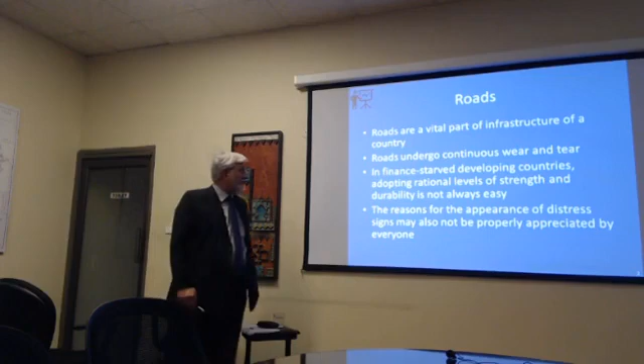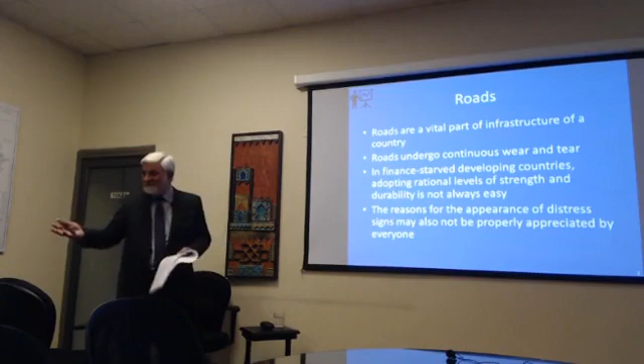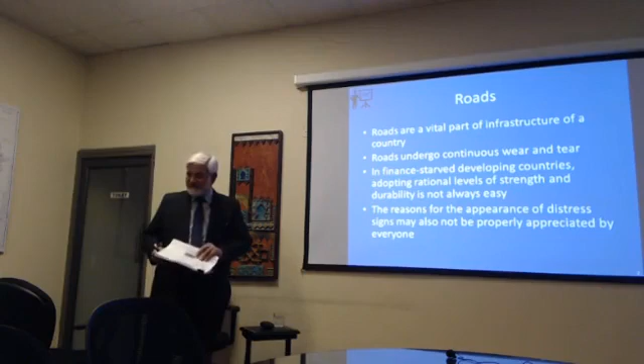Roads, as you know, are a vital part of the infrastructure of a country. I don't know the diversity of the audience, so I have some very basic things - senior people like you might find it too basic, but I have to include it. You must understand that roads, however well built, undergo continuous wear and tear. In a country like Pakistan, which is already finance starved, adopting rational levels of strength and durability is not always possible and easy. The reasons for appearance of distress signs may also not be appreciated by people, and commonly they'll attribute it to the bad practices of engineers and to the bad use of materials, but it is not always so, as I will tell you in the coming slides.

J.L. McAdam was born in 1756, a Scottish engineer who later moved to the USA. He modernized road building by raising embankments so that adequate drainage could take place. Before that, roads were built on the surface and were in a flooded state all the time.

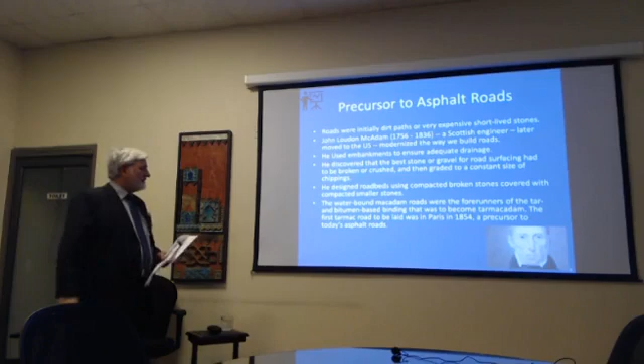He discovered that the best stone or gravel for road surfacing had to be broken down. Today we still use angular crushed stone rather than river-rolled aggregate, and he was the person who really invented this. After him, we have the term water-bound macadam, still used to this day, where road beds use compacted broken and smaller stones, the same methodology used in WBM today.

Asphalt dates back to 1824, when asphalt blocks were first placed on the Champs-Elysees, the well-known commercial street of Paris. The asphalt as we see it today was the work of a Belgian immigrant, Edmund J. DeSmedt, at Columbia University in New York, USA. The first use of asphalt was in New York City in 1877.

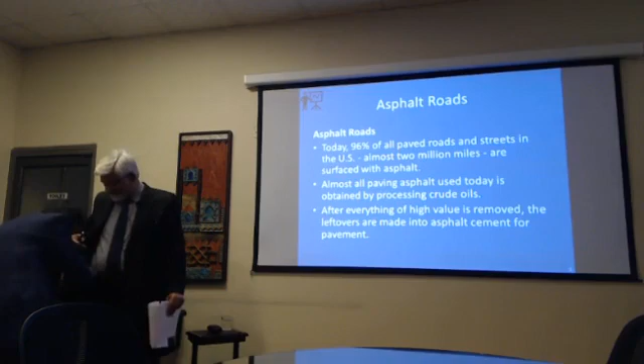Let me clarify at this stage: asphalt is the term used both for bitumen as well as asphaltic concrete. For today's lecture, when I say asphalt, that means hot mix asphalt concrete, not bitumen.

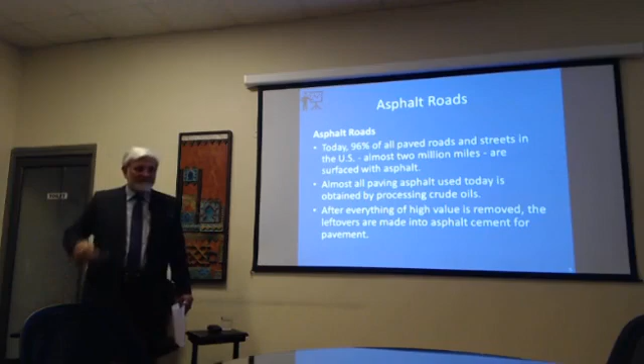96% of the roads in the USA are asphaltic. Pakistan has a history of PSP roads, but we are switching to asphaltic roads, alhamdulillah. And C&W now has almost 60 to 70% of major roads which are asphaltic. Asphalt is obtained from the process of refining crude oil; after obtaining all the useful material, whatever is left is made into asphalt cement for the pavement.

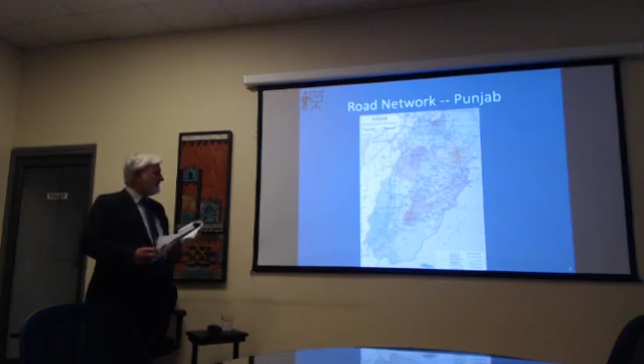The road network of Pakistan includes motorways, national highways, strategic roads, and arterial roads. In the provinces, we have portions of the motorways, the intercity or provincial roads, then district roads which are now merged into provincial roads, and farm to market roads, sugar cess roads, and so on.

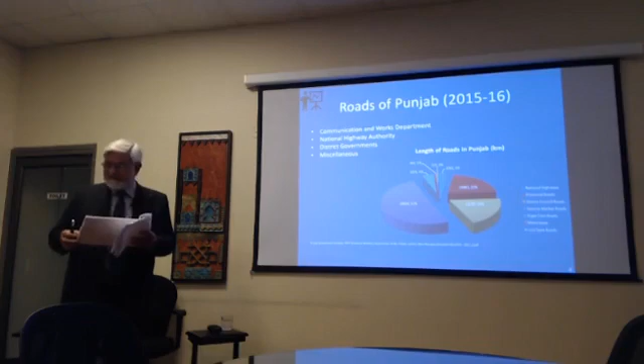This chart shows the percentage or lengths of various categories of roads in Punjab only, based on 2015-16 data from the Punjab Development Statistics, Bureau of Statistics, Government of Punjab, printed in 2017. You can see about 51%, or 39,000 kilometers, is the biggest percentage for farm to market roads, and provincial roads are 16,000 kilometers or 22%.

Then we have a portion of M2 and M3, as you know, in Punjab.

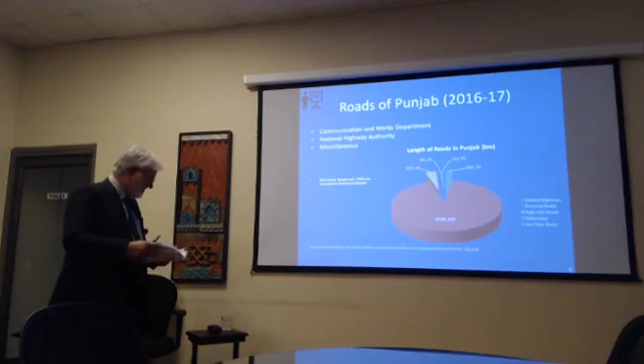This is the next year's data from the latest printed Bureau of Statistics figures. All the district roads and farm to market roads are now merged into provincial roads, so you see 93% of them are now called provincial roads, and the rest are the same as the previous year's data.

As a user, even if not as an engineer in the highway field, you must have seen that rutting, from less to major severity, is present in many roads in Punjab, especially the farm to market roads and district roads which were previously dealt with by district governments. They are more prone to rutting.

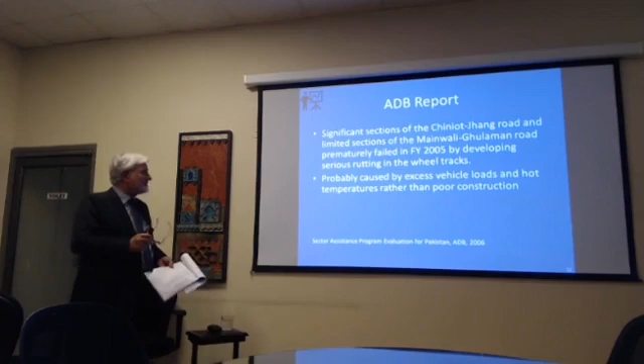This is an ADB report from 2006 by the Asian Development Bank. They reported that significant sections of Chiniot-Jhang Road and limited sections of Mainwali-Ghulaman Road prematurely failed in 2005 by developing serious rutting in the wheel tracks. But they are confident this was caused probably by excess vehicle load, not by bad materials or poor construction.

We have two types of pavement commonly used: flexible and rigid. Flexible is subdivided into TST roads and asphaltic concrete roads. Rigid may be with reinforcement or without reinforcement, the first being jointed plain concrete pavements and the other continuously reinforced concrete. I think we can skip this, everyone knows it.

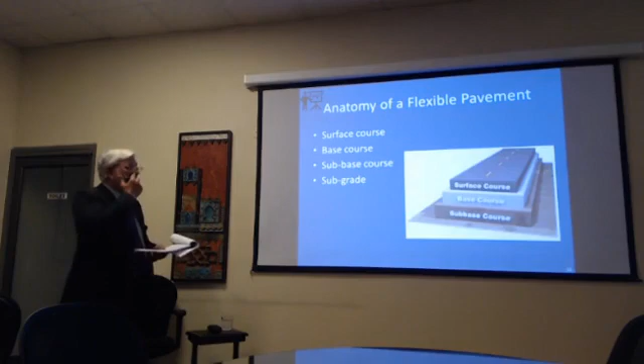This is the anatomy of a flexible pavement. We have a compacted subgrade of soil, a subbase resting upon it, a base course which is a superior material than subbase, and that is overlaid by a surface course which can be TST, or in our case asphaltic concrete, hot mix asphaltic concrete.

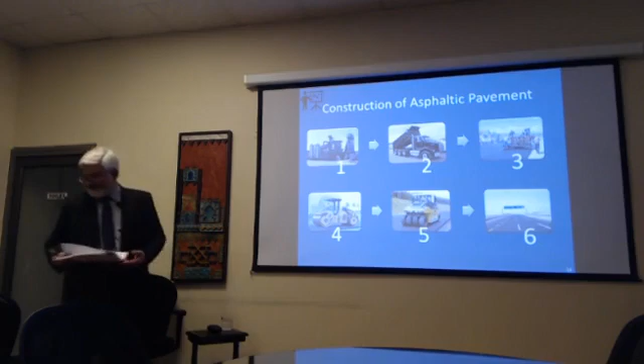Here I am showing you a brief cycle of how an asphaltic road is constructed. It starts with making asphalt in the asphalt plant, transported through trucks to the site and laid through asphaltic concrete pavers. Then it is rolled by steel rollers and pneumatic tired rollers, and you get this final shape that you comfortably travel on.

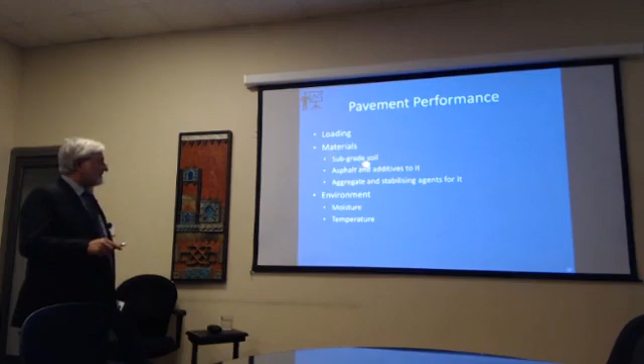Well, the performance of the pavement, largely we can categorize into these subheads: how the loading upon it is acting, is affecting it, how the materials used are affecting it, which are subdivided into the soil, as I already told you, the asphalt and additives to it.

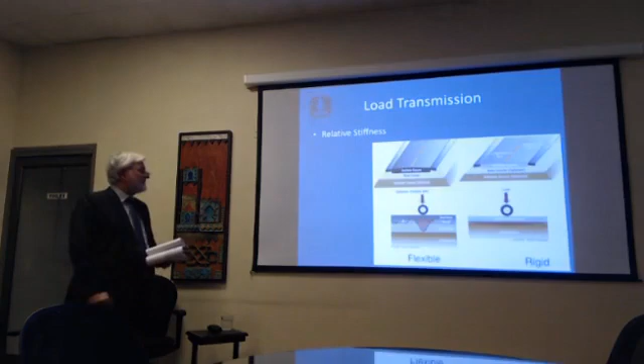Then aggregate and stabilizing agents for the aggregates. Environmental factors include moisture and temperature, of course, temperature being the most cruel factor for the asphaltic concrete. Load also, excessive load, is also a very cruel enemy of the asphaltic surfaces.

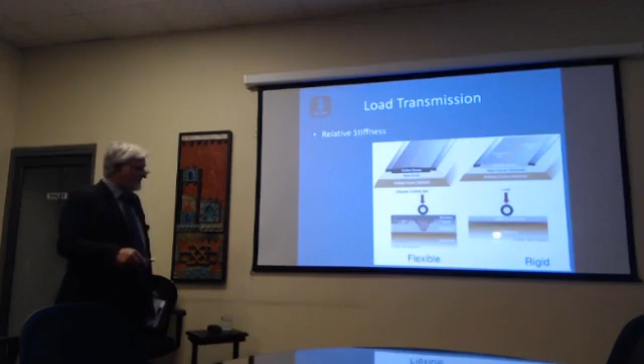The load transmission in case of rigid and flexible pavements - the pressure bulb, as you know, in flexible pavement, the relative stiffness of the top surface is lesser than the stiffness of the underlying layer. Whereas in rigid pavements, the stiffness of the top surface is comparatively higher than the subbase and base material. The Americans call everything below the surface as subgrade.

So we have a stiff material resting on a lesser stiff material in rigid pavement. So the distribution of load in rigid pavements is better, and in asphaltic or flexible pavements, it is confined to a smaller area. That is why they are more prone to damage or deterioration.

Other than rutting also, you know, there are so many other distresses which can affect the pavements - cracking, deformation, deterioration, material problems, and problems associated with the seal coat.

This itself is a very lengthy lecture if I come to other factors. So I've just enumerated what cracking could be - of the type longitudinal, fatigue, or transverse, or it can be reflective cracking if the asphalt is laid on a rigid pavement or concrete underlay.

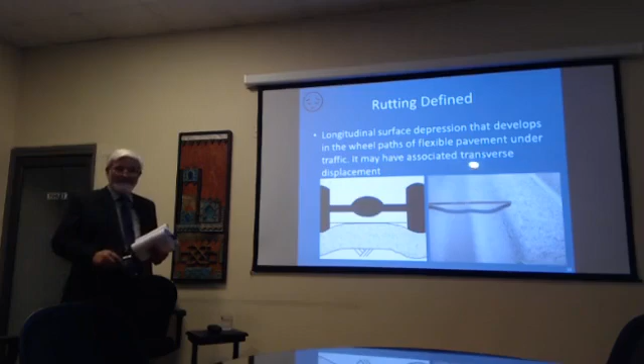So more often it is not an isolated or lone distress to the road. It is always associated with transverse displacement.

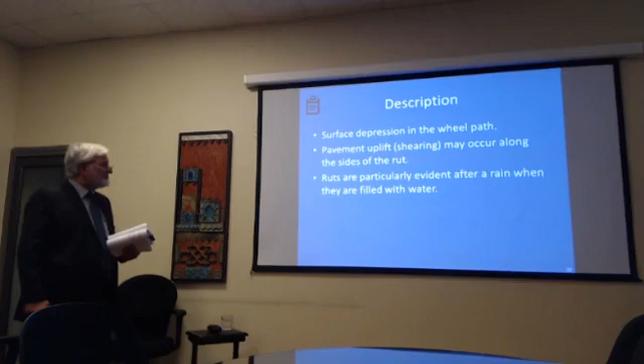The textbook description of rutting is surface depression in the wheel path, pavement uplift due to shearing action occurring along the sides of the rut. Ruts are particularly evident after a rain when they are filled with water, and they become more dangerous.

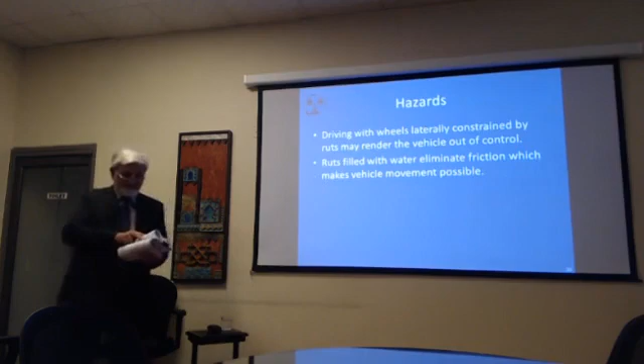In the next slide, I'll show you what is the hazard with ruts filled with water. Driving with wheels laterally constrained by ruts renders the vehicle out of control. Ruts filled with water are particularly very dangerous - they eliminate friction between tire and the road surface.

This friction is, as you know, necessary for making the vehicle's movement.

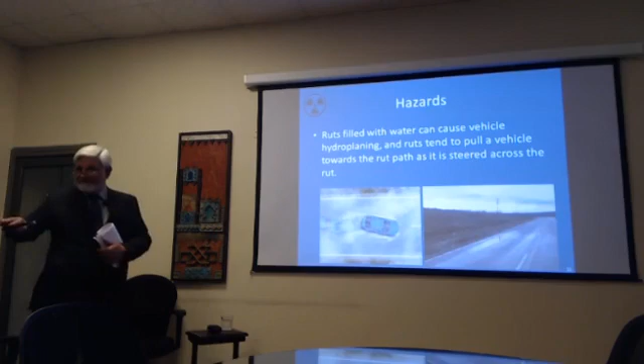The ruts filled with water also cause a phenomena called aquaplaning or hydroplaning. In this, the vehicle really becomes airborne or it leaves the surface - the tire leaves the surface and it is just floating in the air and cannot be steered across the rut. Further, ruts tend to pull a vehicle towards the rut path as the driver tries to steer it out or across the rut.

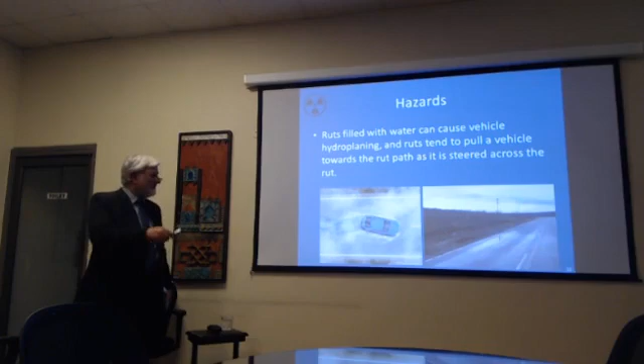Here I am explaining what is hydroplaning. In normal circumstances, the tire has contact with the surface. While if it is hydroplaned, the tire has no contact with the surface and it's just floating in the air over the layer of water.

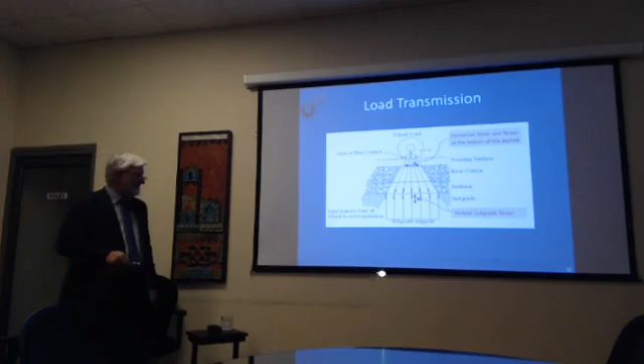So this is why if you have a thinner medium or structure here, the intensity at the subgrade or the soil would be very high. And that's why subgrade rutting would take place, which makes you, it doesn't leave you with any option else but to discard whole of the road and reconstruct it.

The rutting could be due to asphaltic layer, contained within the asphaltic layer only, or it can travel down to the structure or the subgrade. So it can be caused by the asphaltic layer or can be caused by the structural layer.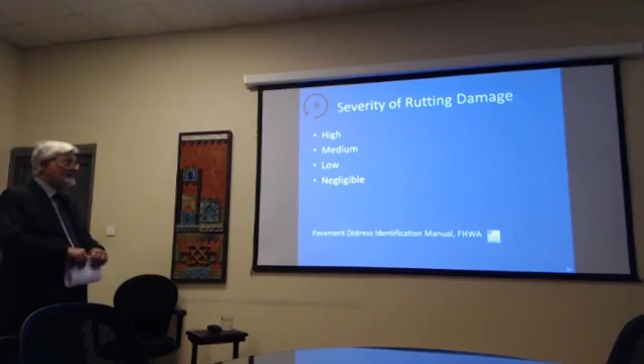Now there is no one global system of defining the severity of ruts, and you should not really try to correlate the system enforced in one part of the world with another. This system I have taken from the Federal Highway Administration of the US and Department of Transportation. They classify the severity of rutting into high, medium, low, and negligible.

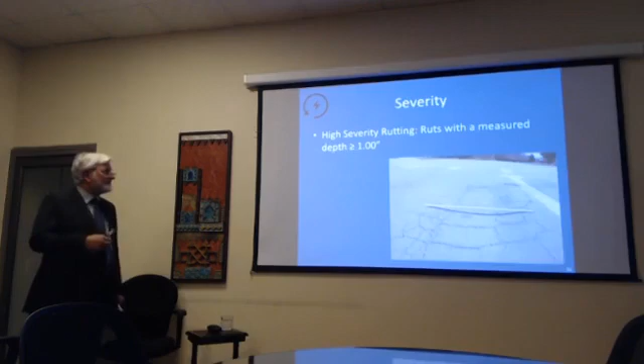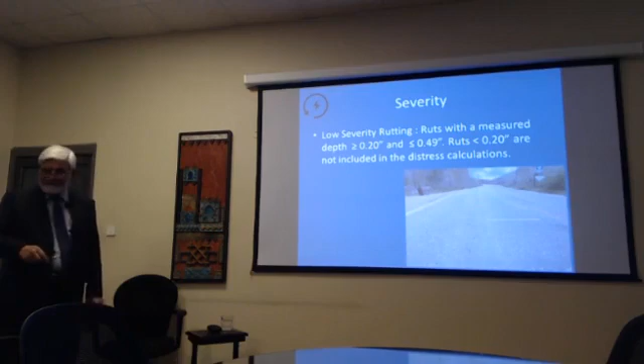High severity rutting is more than 25 millimeters or 1 inch, measured at the center or the middle of the rut. Medium severity rut is between half an inch and 1 inch. Low severity rutting is between 0.2 and half an inch. Ruts lesser than 0.2 inch are not included in the distress calculations and are recommended to be left alone.

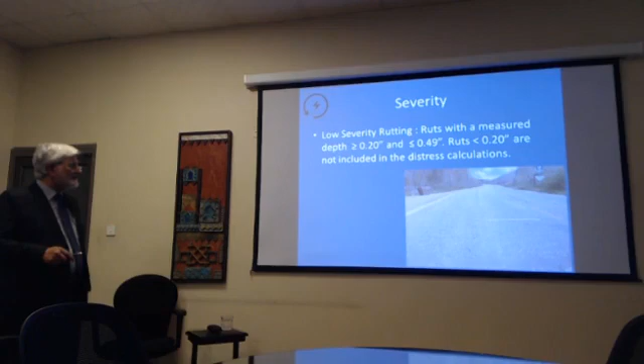I already told you it is between 0.2 inch and 0.49 inch. I think we went back. Okay.

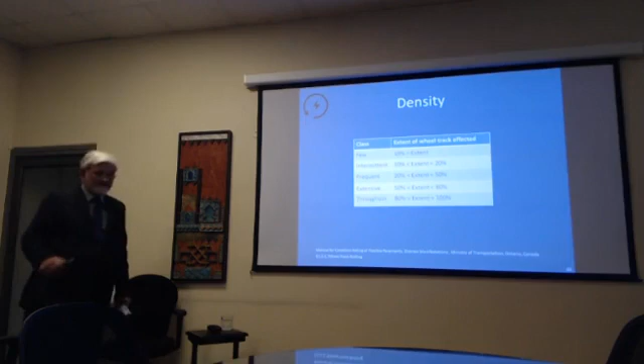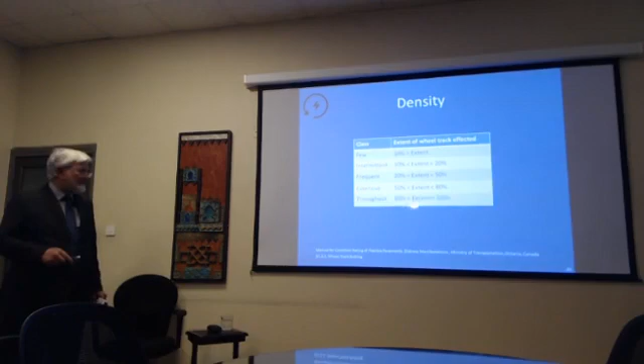Next sir. The same manual from Ontario, Canada, Department of Transportation also talks about density of the rutting. Firstly I talked about severity, now I'm telling you the density. They call it few when the extent is less than 10% of the total length, intermittent when it is between 10% to 20%, and frequent rutting when 20 to 50% of the road length is affected. The rutting is called extensive when it crosses 50% up to 80%, and over 80% the whole of the road is affected, they call it throughout.

Now we should move to the probable causes, the specific causes that cause rutting. They include insufficient compaction of the pavement layers, including sub-base, base, subgrade, and the asphalt itself, compression of unbound layers, and subgrade rutting as a result of inadequate pavement structure. As I already told, the thinner the structure, the more load would go to the subgrade, and the subgrade would undergo rutting.

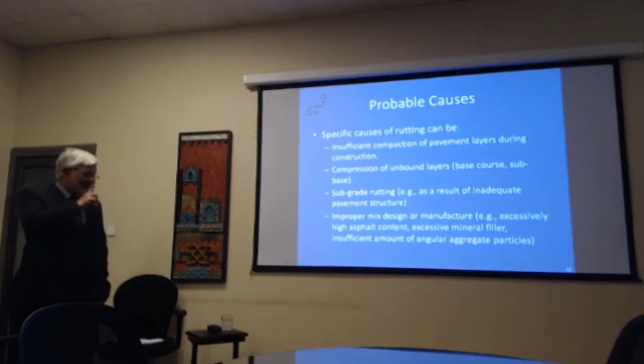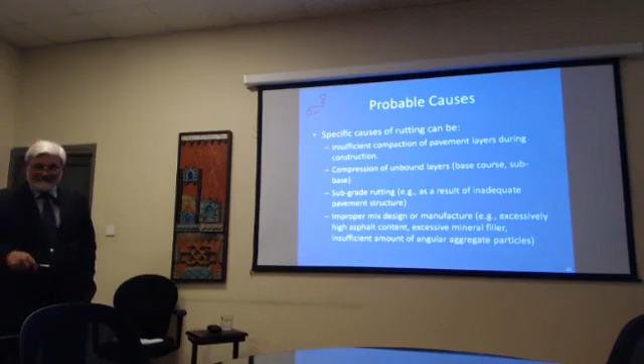Now mix design is a very, very delicate department, Shamim Saab is sitting here, he is doing this all the time. So the material engineer gives you the JMF or the mix design. What I have seen during my experience is the contractor would tend to adopt one JMF without noticing that the source has changed, the bitumen content has changed, and mainly the source of aggregate changes, but they are using the same JMF which they got approved previously on some other project. So we have to be very careful about mix design.

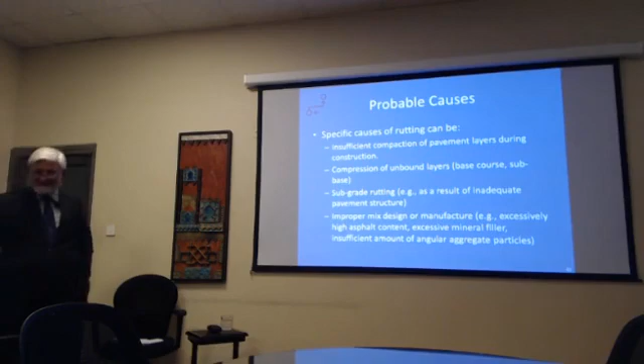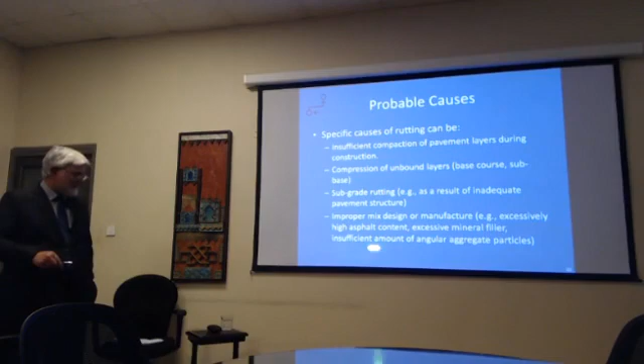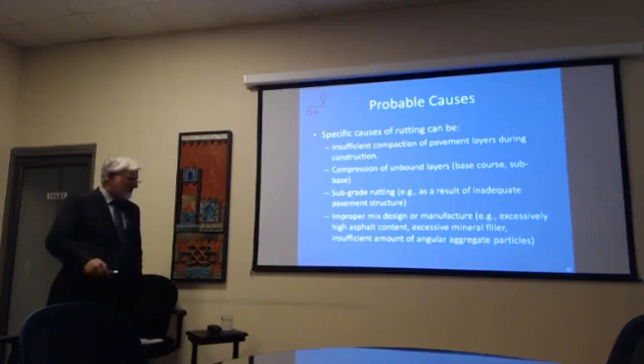During the construction phase, high asphaltic content - a layman would say if you put more asphalt, more bitumen into the asphalt, it might turn to be stronger, but rather it is almost the reverse. If you are adding more than the required asphalt content, the asphaltic road would tend to develop more ruts. Excessive mineral filler, insufficient amount of angular aggregate particles - the experts would agree with me that in the C&W department we are using water-bound macadam instead of aggregate-based course, which relies on interlocking of the angular aggregates and performs very well. Next sir.

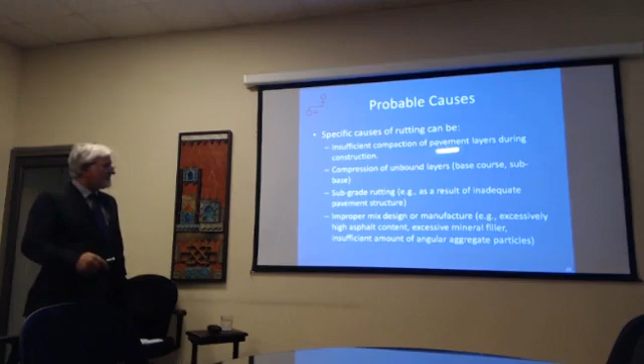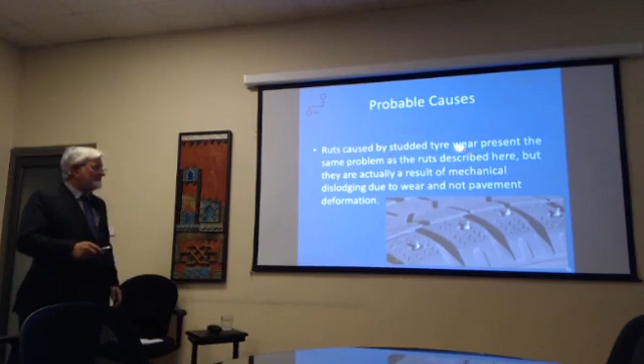Okay, the studded tires or chains cause mechanical wearing of the asphaltic surface, and they can also cause a wear which is very much similar to structural rutting. But they are actually a result of mechanical dislodging of the particles due to wear and not a pavement deformation due to load. Next.

Okay, now perhaps the most cruel menace is overloading of the roads. We have been trying - my colleagues in the C&W department would bear me out and agree with me - that we have tried a lot to control the axle load, but unfortunately the axle control on provincial roads is not very effective. There are political reasons behind it, you can say personal reasons, vested interests of the local growers, cane growers. But this is the thing which is most dangerous: the cane-loaded, sugar cane loaded single axle trolley, with about 4,000 kilograms of sugar cane, is transported from the farm to market roads, which are already very meager in the structure of the road.

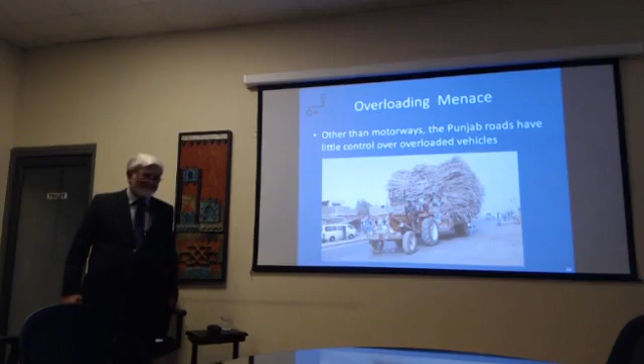Of course, in a country starved of funds like Pakistan, it's not possible perhaps, but if you have the will, you can see the NHA has controlled it over motorways and sections of national highways. So if you have will, you can always do it. NHA has about 2 feet crust, whereas we generally have 1 foot, and they are controlling the load.

The same traffic which travels on the NHA roads also comes on our roads.

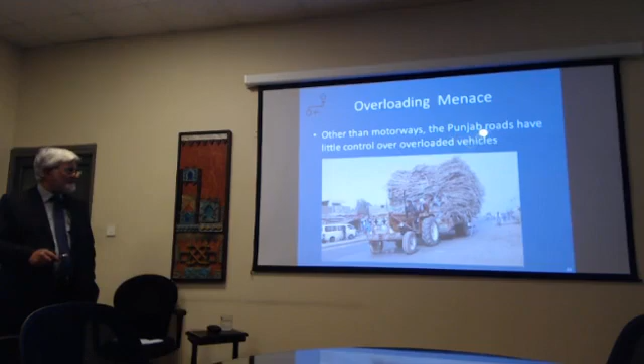So by that I meant axle load control is important not only on the NHA roads and motorways, but also on the district roads, farm to market roads, and sugar cess roads as well. Now, what does overloading mean to the road?

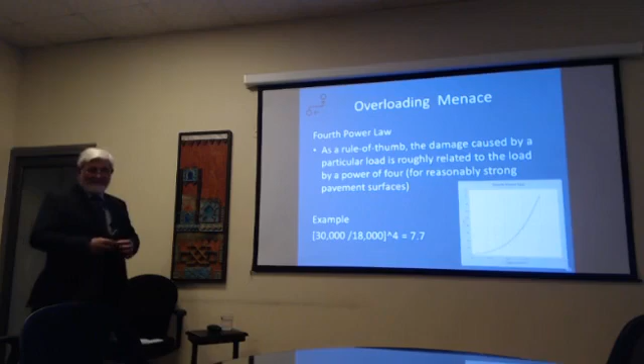It's not like if you double the axle load, the damage would be doubled. In fact, it follows the fourth power rule of thumb - the damage caused to a road is roughly related to the load by a power of 4.

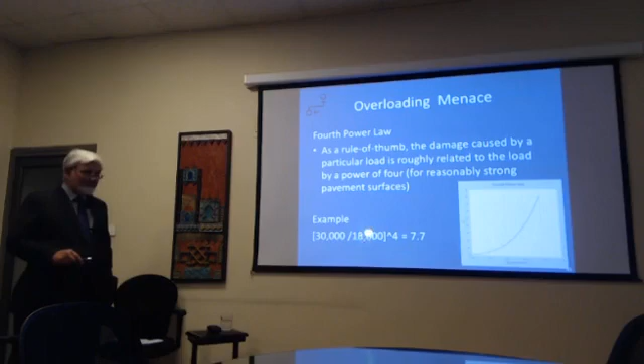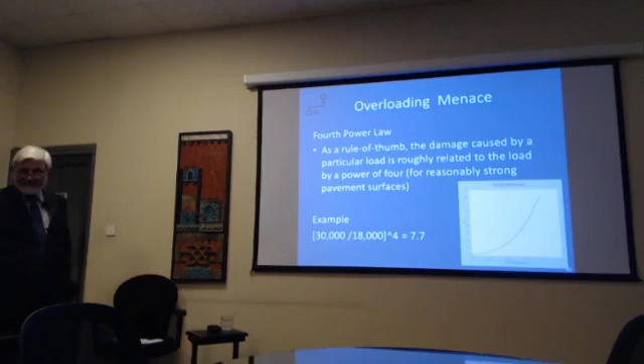Designers here would know that 18,000 is the standard axle load. This is common in sugarcane-loaded trolleys, sometimes more, I've seen trolleys up to 40 quintals. So if it's 30,000, the ratio is more than 1.5, less than 2, but the damaging effect is 7.7 times - like 7.7 axles passing, just by increasing the load 50%.

So I'm telling you from my own experience, not the textbooks, that if we can control this axle regime, if we can enforce it, more than 70% of roads can be saved. Millions, trillions of dollars are going to waste due to this uncontrolled loading.

This is the standard configuration of the trucks. You would also notice some spelling mistakes, but I've taken this as is - I didn't want to redo it. This is published by the NHA.

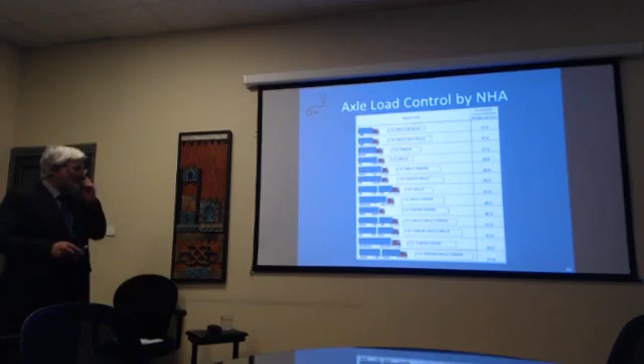This is the most dangerous thing - the 2-axle single bed Bedford truck. They are confining the maximum permissible gross load of the vehicle. So if the configuration is like this and loads are kept within this, they say it's not going to injure the road.

But if the configuration is changed from standard to non-standard or innovated, or the total laden weight of the vehicle is crossing these figures - which is normally the case on our provincial roads - then you should always expect deterioration of the road: distress in the shape of shoving, depressions, potholes, or ultimately rutting.

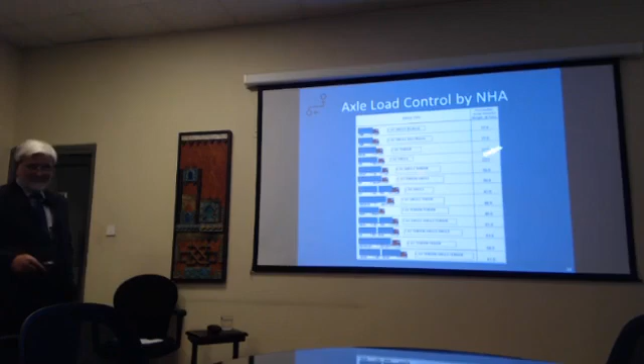We can now classify the causes of rutting into those related to construction - which includes manufacture and laying at the site - then the materials themselves, and the climatic factors, as I told you, moisture and pressure are the enemies of the road. Also traffic-related and design-related problems.

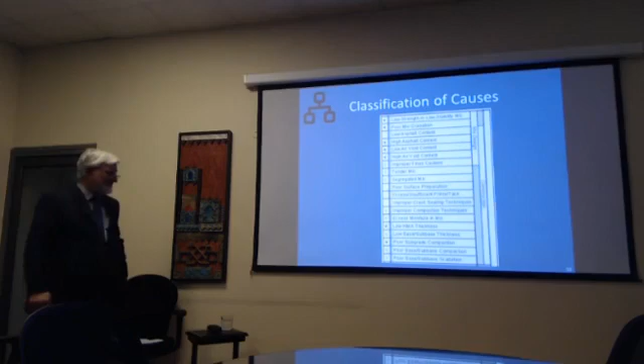Now these are lesser evils than low thicknesses and poor subgrade compaction, which are also severe causes. Where they don't contribute to rutting issues, they contribute to other distresses, but not to that.

Materials: low asphaltic binder viscosity and temperature susceptible asphalt binder. These are the major factors which are contributing. Climatic factors: high exposure to moisture and high exposure to temperature are known to cause deterioration.

High axle volumes. Well, I think they are not familiar with the term uncontrolled load, they are not included in that category, but this is high axle volume, of course. Heavier axles on the road lead to it. If I had made it for Punjab, I must have included the most cruel enemy, which is uncontrolled axles.

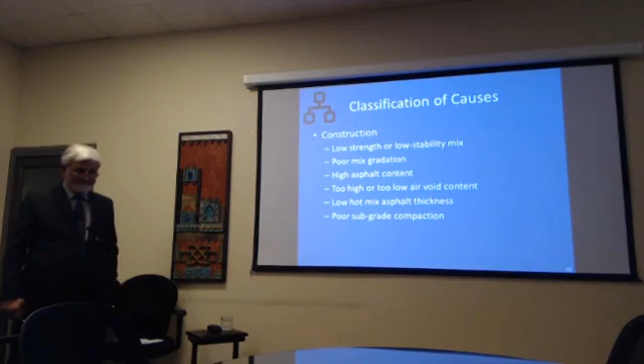If subgrade compaction is hardly 85%, then it will affect performance. Otherwise, if it is 90 or 92%, it is not going to affect it much, because it is a very small percentage of the load, provided there is sufficient thickness of gravel, so that the load is adequately taken up by the structural layers even if subgrade compaction is 90%.

We can discuss it in the question and answer session. Construction causes and material causes, as I told you, include low asphalt binder viscosity, temperature susceptible asphalt binder, and climatic factors including temperature, which affects it most, along with high axle volume and exposure to studded tires. I think we have discussed it.

So what should we do? The best thing is that we should not let the ruts happen. That's my advice: do it right the first time.

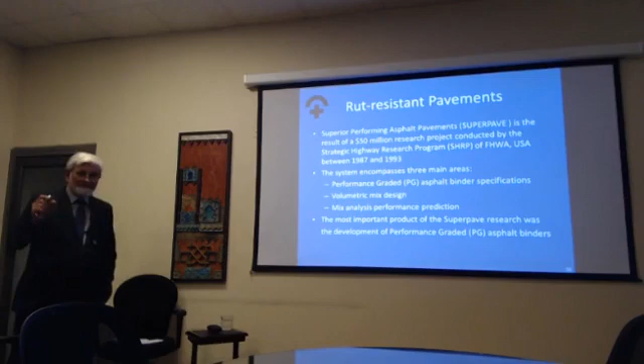This system encompasses 3 main areas. The best thing that they came up with was a performance grade, which is another binder.

Performance grade asphalt binder. Usually we have penetration grade, which we normally use in Pakistan.

Volumetric mix design, mix analysis, performance prediction. And the most important product, as I told you, was the performance grade asphaltic binder.

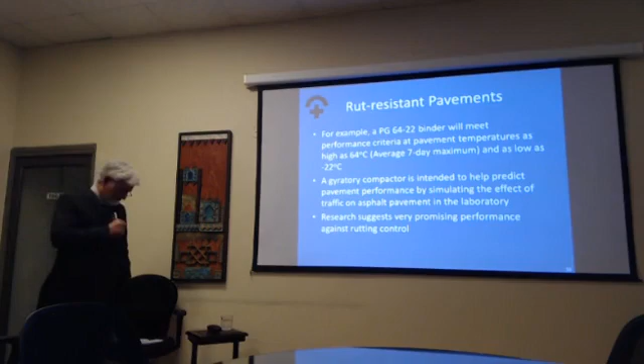Next. Yeah. Of course, and some agency... No, sorry, I'm not saying they should fund it, of course. That's right.

I just wanted to point out that they should take a lead role and begin suggesting at least to the P&D department or the decision makers, or the high-ups.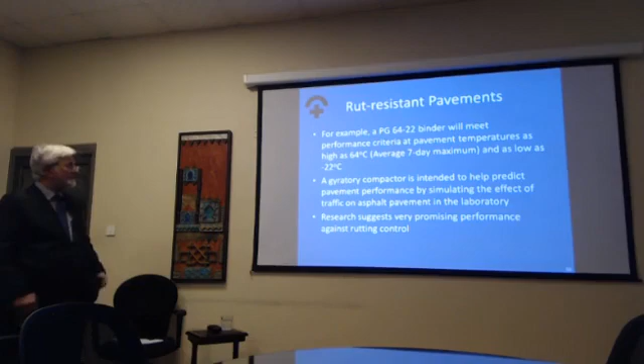If the road has rutted to a very high severity, or is heavily rutted, you need not blindly jump to conclusions and start making remedies. It has to be investigated thoroughly to determine the root cause of the failure, whether it is present only in the asphaltic pavement, or down to the structural layers, or down below to the subgrade or soil.

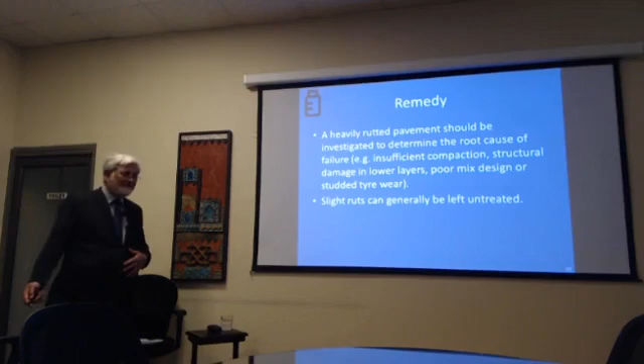Insufficient compaction, structural damage in the lower layers, poor mix design, or studded tire wear - what has actually caused the wear - then you can put in the real remedy. Slight ruts can generally be left untreated, as I told you, less than 6 mm or 0.2 inches, they can be left untreated. Next.

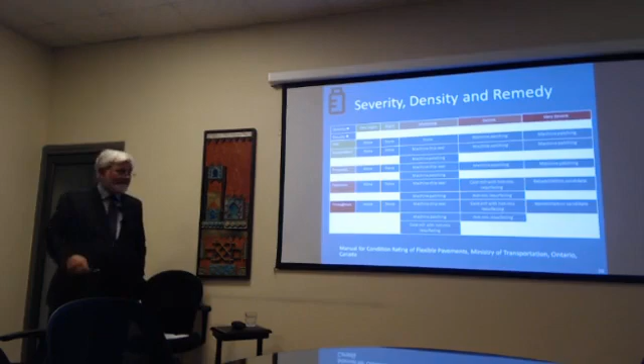Next. This is again a very useful, handy table, based on the same manual from the Ministry of Transportation, Ontario. I'm sorry I'm giving too many examples from the West because we don't have any standardized manual or code suggesting such remedies or such indices.

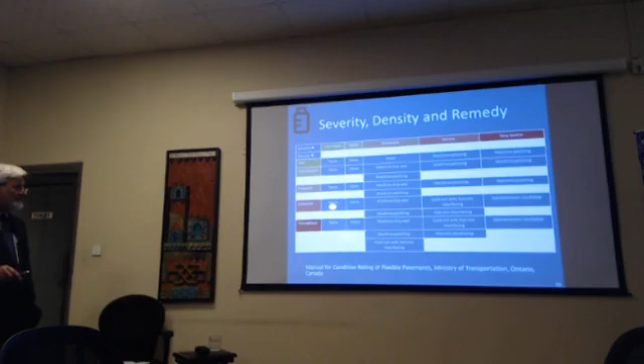On the horizontal scale, we have severity as already told in the preceding table, and on the vertical columns, we have the density or the scatter of how frequent is the problem of rutting in the road. So in the first two categories, they suggest if the rutting is very slight to slight, you can just leave it.

If the rutting is of moderate severity, then they say from machine chip seal or machine patching up to, if it is scattered throughout, then up to cold milling with hot mix resurfacing.

Similarly, you can see if the severity is also severe and the extent is also scattered throughout the road, then rehabilitation perhaps is the only solution left. And in between there are shades you can see, you can choose.

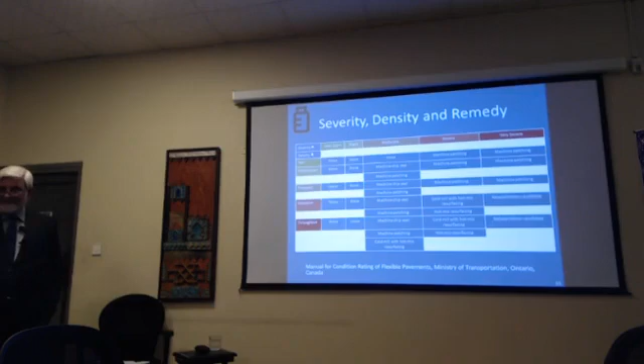The important thing is that the designer and the site engineer have to decide together. One remedy cannot be given for every situation and every road. So you have to decide, seeing the situation, root causes, and of course the available funds, which are the main factor. Next, sir.

The remedies, as I already talked about, can be split into two categories, whether the causes are only present in the asphaltic layer or they have gone down to the structural layers also. If they are only in the asphaltic layers, you can choose between, seeing the extent of distress and your funds available, full depth full width repair and rut width repair.

If you have to carry out full width repair, it involves full width milling and replacement, or you can choose full width overlay, or you can remove the asphaltic layer and relay. If you do overlay, there's also a chance of special issues. You have to decide based on the available data and the results of the investigation you took at the site.

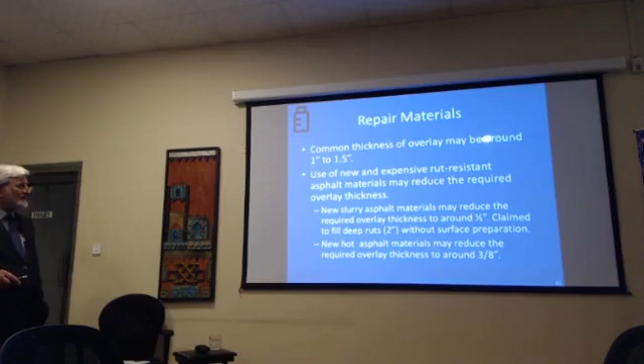What are the commonly used repair materials? 1 inch to 1.5 inch overlay is the common remedy adopted here also. Use of new and expensive rut-resistant asphaltic materials may reduce the required overlay thickness. New slurry asphalt materials may reduce the required thickness to about half an inch, or if smaller size aggregates are used, they can reduce the thickness to 3/8 inch. We are not using it, so I won't recommend we blindly get on to these high-fi materials, but again, research and development is required before we can adopt it in our local environment.

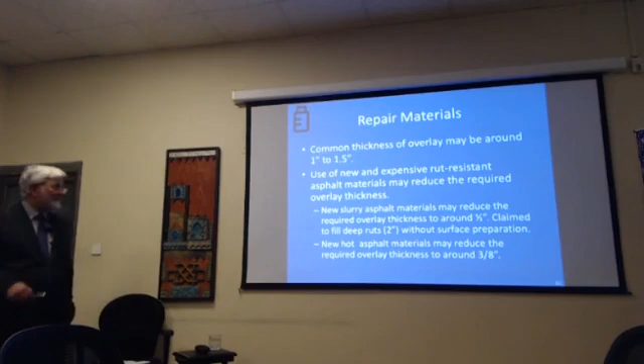These are just to give you an idea. Of course, nobody has used it here, but advanced countries are already using microsurfacing for remedies, which is a thin slurry or asphaltic slurry, or ultra thin bonded wearing surface, which includes thin hot mix asphalt concrete and Portland cement concrete overlays, stone matrix asphalt pavements, and post textured hot asphalt concrete pavements. These are other than the normal overlay material which we commonly use here.

Rut resistant conventional hot asphalt mixes include modifications to the conventional asphalt by certain additives.

Now the decision making: asphalt is a very costly material, and when you are going to make remedy, you have to take a decision. If you put good material over existing poor material, it is going to be a waste, as you know. So before placing overlays, you have to get yourself assured that your structure down below and compactions are good enough to sustain this. The proposed new multi-layered system shall be designed employing a suitable design method if one can be found.

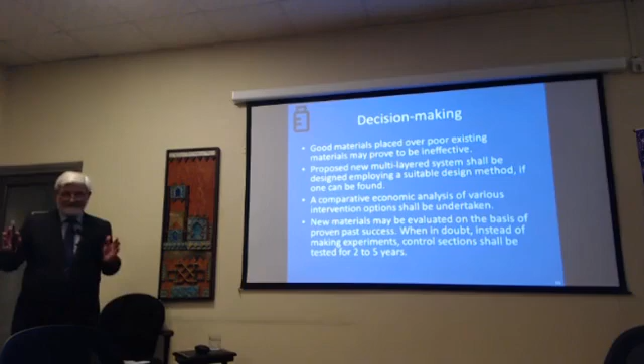Comparative economic analysis of various interventions shall be undertaken. New materials may be evaluated on the basis of proven success, but as I have repeatedly been saying, don't go blindly for using them. Whenever you are in doubt, instead of making experiments, make control sections of say 1 kilometer or 2 kilometers and test it for 2 to 5 years before adopting it on the entire road.

This is again a decision-making chart, whether the kind of distress—of course this will depend upon the experience of the engineer making the decision—can be neglected. If it is not so severe, or negligible, you can neglect it and continue to monitor the road. But if it has entered a stage where it needs intervention, then you will see whether it is initiated by the asphaltic layer or the problem lies elsewhere.

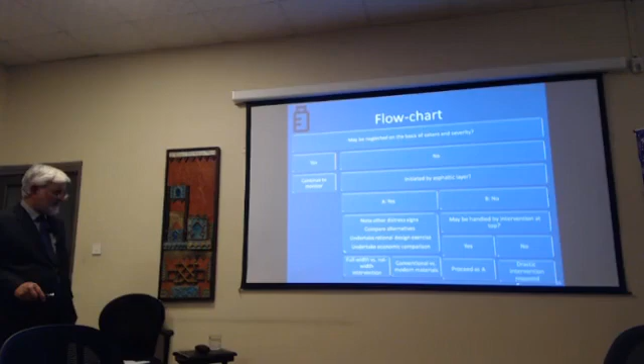If it is in the asphaltic layer, note other distress signs and compare alternatives. Undertake rational design exercise or economic comparison. If it is not in the asphaltic layer, the engineer has to decide whether it can be handled by intervention at the top. If yes, then adopt this methodology. If not, then full width intervention or redoing of the road would be required.

So, summary of today's talk: asphaltic roads require extreme care at all stages of design and construction. However well designed and well constructed a road may be, it needs continuous monitoring and maintenance. If you save small amounts on maintenance, you will have to incur heavy costs on redoing or remedy of the distress that would occur later on.

Rutting is a major distress that may lead to accidents. Remedies must be undertaken after proper investigation and diagnosis of the causes, and just by naked observation by an unskilled or untrained engineer should not be started. The prophylactic role of surface remedies should be considered.

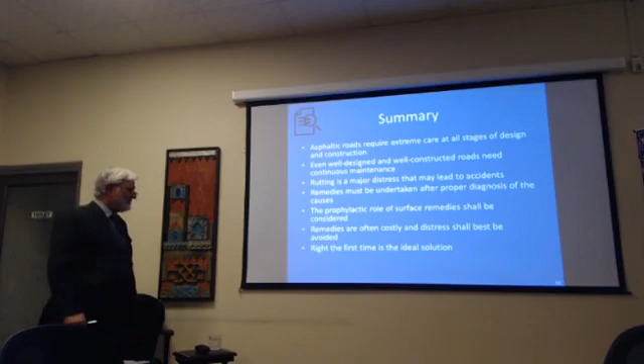That means if you put a small amount into rut width repair or localized patch repair, will it last a year or two before other factors force you into a relay or full width repair in later years? Why not do it now if the funds allow?

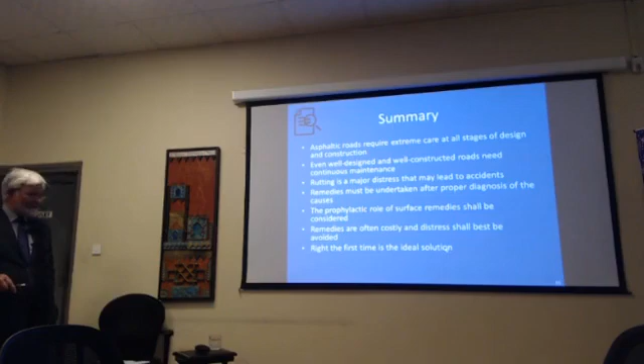Remedies are often costly and distress is best avoided. As I already told you, the best thing is to do the right thing in the first instance, the first time—that is the ideal solution. Because if you leave flaws, if you don't follow specifications or good engineering practices, you are apt to face a difficult situation later on.